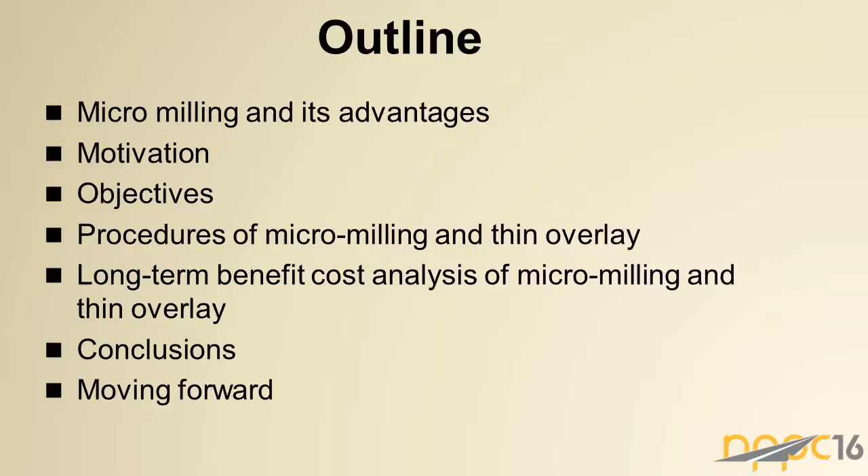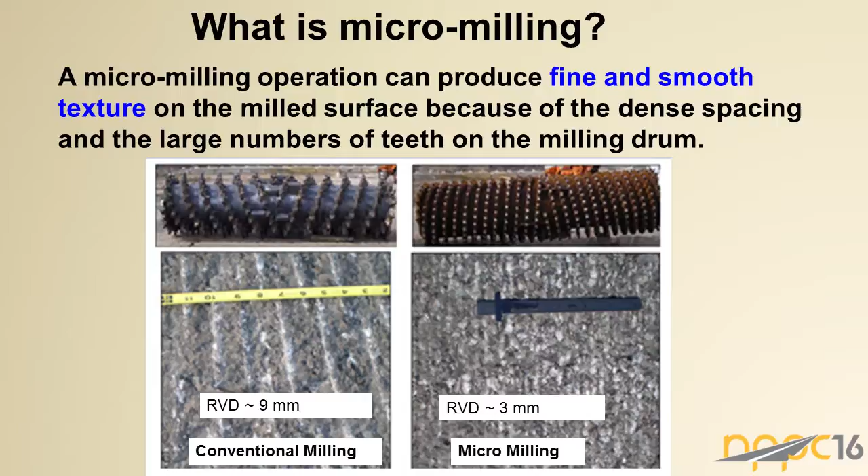Okay, so basically, what is micromilling? Micromilling is an operation that uses a much finer and smoother texture. Micromilling itself allows you to use smaller drums, which gives you a much smaller ridge-to-valley measurement. As you can see on the conventional side, you're using a much larger drum of 9 millimeters, and for micromilling, we're using a 3 millimeter drum, which gives us a much smaller ridge to valley.

Micromilling itself has several different advantages. You'll see improvement of the surface smoothness, comfort, and also safety. We had a project on I-95 around our coastal area, and once we rode the project and checked the IRI, it was actually lower than 825 millimeter, which we all know is comparable to real new pavement.

Another advantage to micromilling is improved work flexibility. It allows you to get traffic back on the surface a lot faster, and also gives the contractor flexibility in arranging his pavement operation.

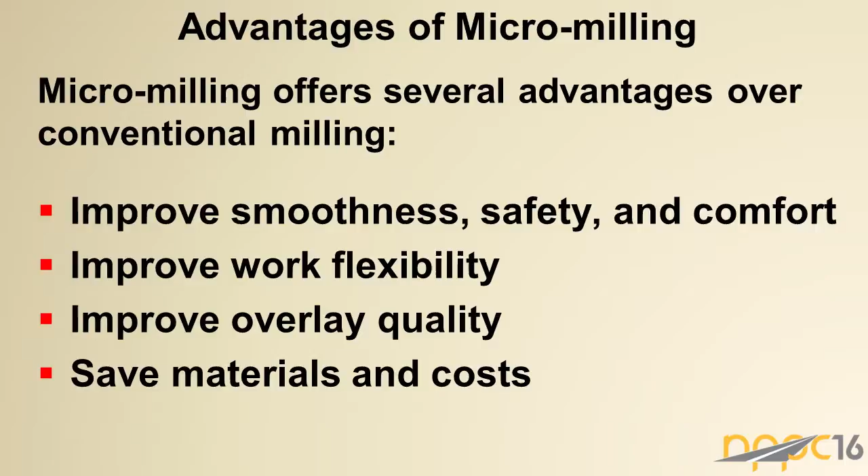Another advantage is improved overlay quality. It creates a more uniform surface and a better bond to our overlay than it would in a normal conventional milling surface. It saves material and cost, allowing you to use much thinner layers, and even a more porous surface.

Some of Georgia's motivations to go towards micromilling stem from constantly looking for better pavement preservation methods. In 2007, we decided to pursue this research and develop a new pavement process for micromilling, which was supposed to show us a more cost-effective replacement only on our thin open grade lift. Instead of milling down the traditional 1.5 inches, we decided to only take off the very top layer of our OGFC, because we identified that the bottom layers were sound.

Some other states, like Virginia and Maryland, are also using micromilling, but mostly for a good ride surface. In Georgia, we're using it, but we're also using a thin overlay. Basically, we'll take out 7/8 to an inch of our OGFC and replace it back without disturbing the sound base. We found this to be a great cost savings.

We identified that on our I-95 project, it saved us about $60,000 per lane mile. For example, we had 14 miles on that project, 6 lanes, which resulted in a cost savings of more than $5 million.

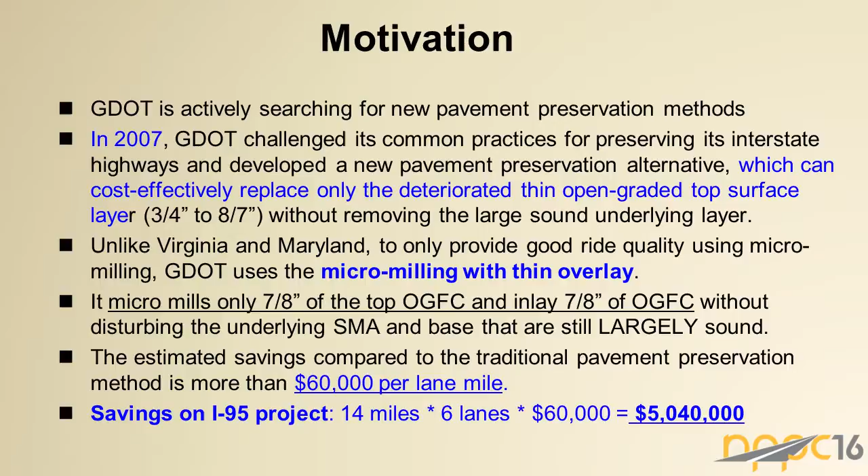I think we touched on this a bit, but to show you the actual detail: if you look at the conventional side, you'll notice you have your 7/8 layer of OGFC and then 1.5 inches of SMA. That's normally what we would mill out during conventional milling. But on the right-hand side, with micromilling and thin overlay, you'll see the red box showing a typical section of just the OGFC being removed.

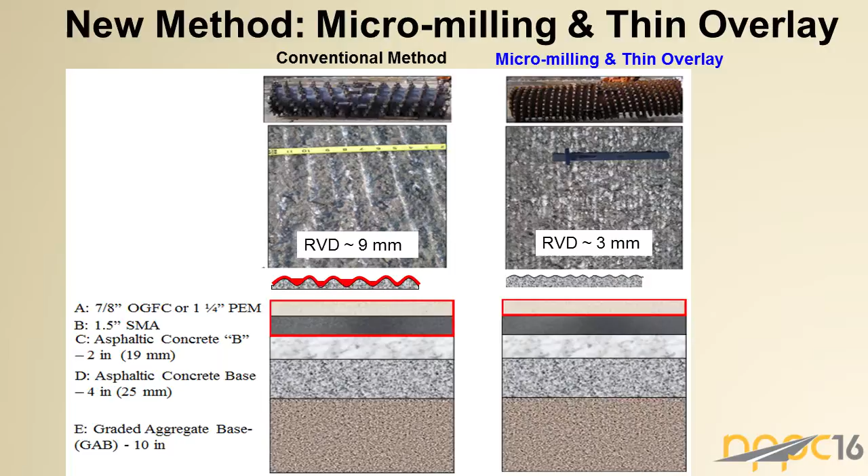To ensure the success of this program, we've implemented new processes to make sure we're meeting ride qualities. The construction procedures allow them to go in, do pre-treatment, micromilling, and clean. Before we start a job every night, we'll take a 1,000-foot section, adjust it, and make sure we're meeting the milling speed and drum speed.

We also verify that we have the ridge-to-valley depths we're trying to achieve by using an automated RVD, a ridge-to-valley measuring device. We've modified our laser profilers to retrofit them for faster, continuous measuring. We noticed we're able to get more real-time data and feedback when doing this.

If anyone is interested in knowing more about our specifications, you can find them in Georgia Special Provision Section 432, Mill Asphaltic Concrete Pavement on micromilling.

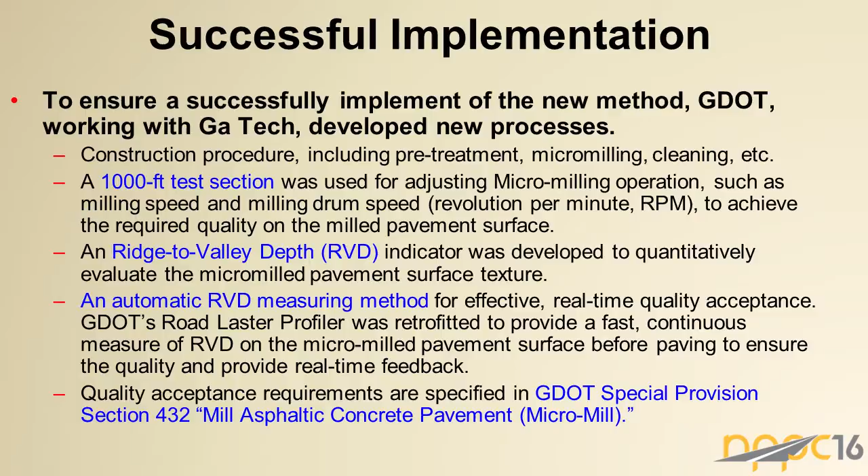Some of our typical projects: I-95 was done in 2011, 100 lane miles. I-75 was 2007, 96 lane miles, and I-285 in 2012 was another 100 lane miles. We're currently working on the downtown connector, the one Adrian spoke of, and we've had some issues with dusting and getting water on it.

But some of the things we're doing, like allowing cars to get on there earlier and letting them ride on the road for several days, we notice all of that dissipates and we get a much better bond. So we're kind of proud of what we're doing with micromilling in Georgia.

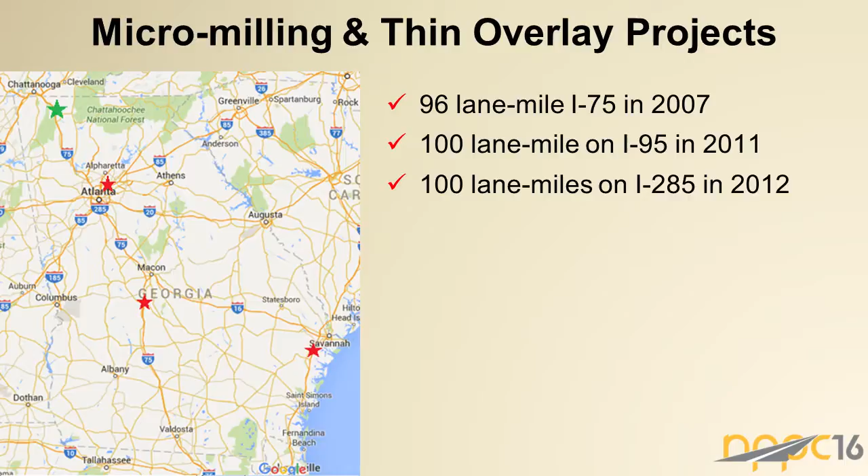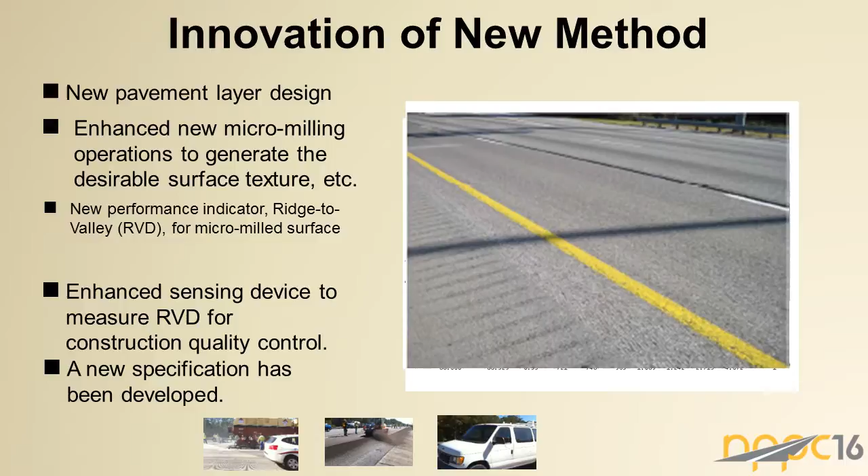They decided, well, if they can put in a smooth surface, the underneath—even serving 15 years or 12 years—is still good, you do not touch that. Just leave it there, the SMA continues on. So to summarize, there are a couple of new things there.

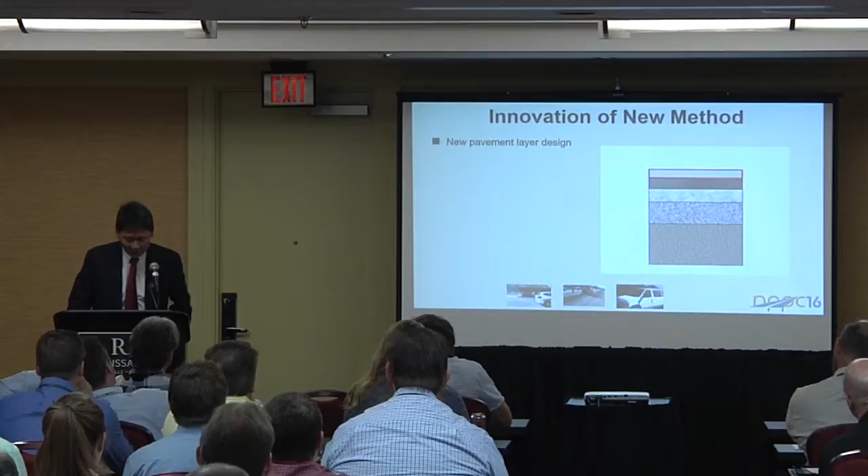One is a new design: the concept is that you're just milling out the OGFC 7/8 inch, and you do not touch anything underneath. The second is basically an enhanced new micromilling operation to generate this, using the drum and all of that.

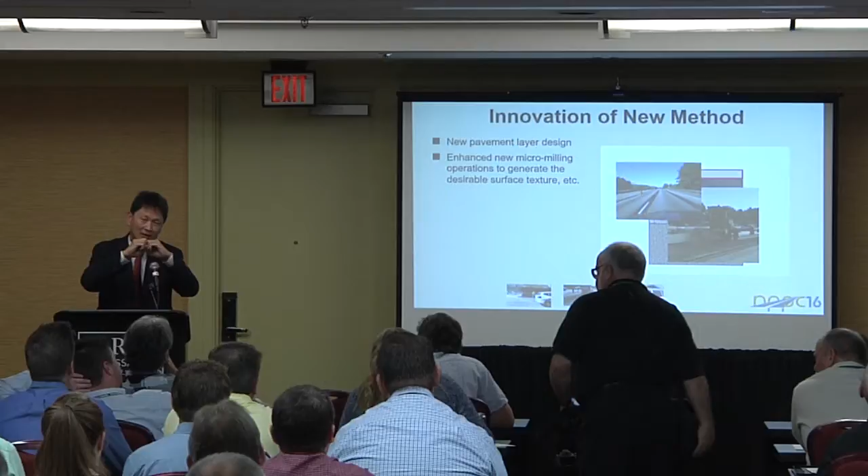From the contractor industry, they kind of bring this one in, so we set up a spec first. In a way, it's a ridge-to-valley, because on the OGFC, a lot of time, in our case, OGFC is on the top 7/8 inch on the interstate highway. You directly put that layer, so the surface water drainage becomes very crucial.

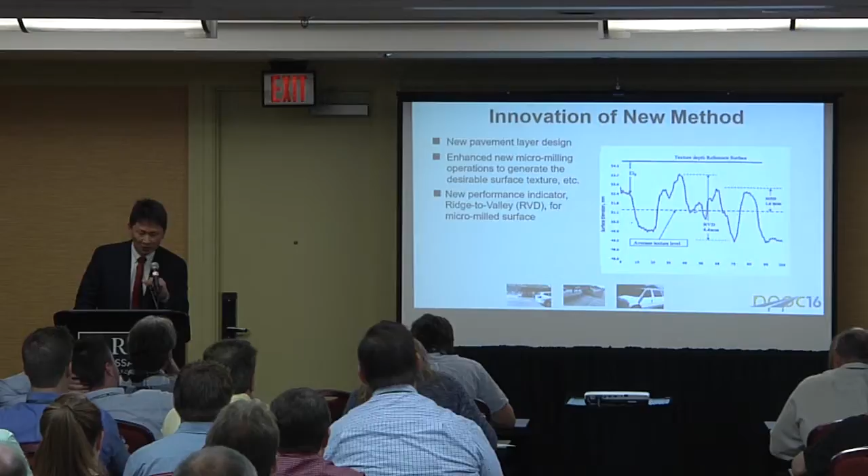Therefore, we set it up and put together a new indicator, ridge-to-valley. That texture indicator tries to ensure the water can go out smoothly, smooth enough, and water not sitting there to laminate the surface, because otherwise it's going to be gone very quickly. So there's a new texture indicator that's been put together.

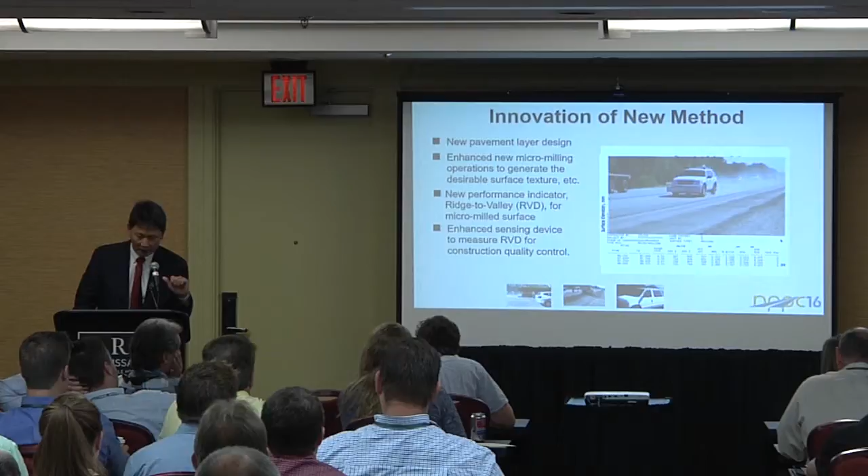Earlier, using the handheld test was really not practical. So later on, we kind of retrofit and put that together in the 3D laser, so you can test real time, every 0.5 mile. After milling 1 mile, you test 0.5 mile and get a result very quickly. In the end, there's a specific spec that came out of that.

I think one of the key things researchers would like to ask is related to this saving a lot of material. We did not even quantify the cost, like Andrew mentioned about the green saving - this is just material cost. You can save up to $5 million in just one project, roughly $60,000 per lane mile.

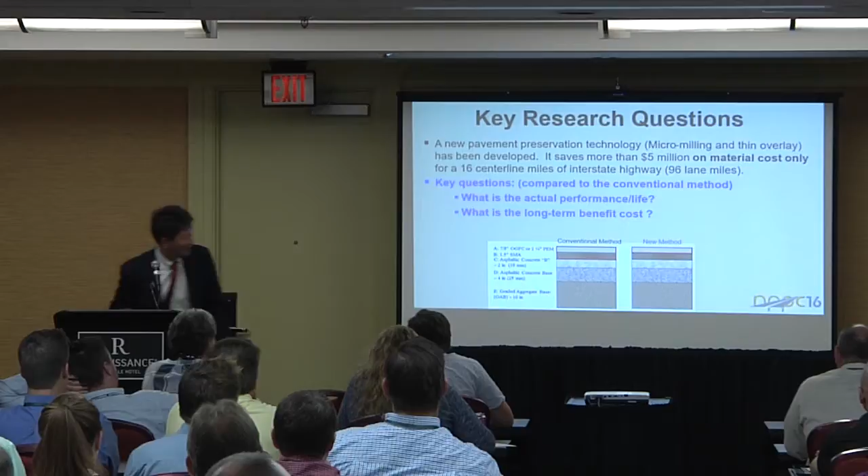But some people with key questions say, well, compared with conventional milling, conventional method, what is the actual performance? I think people say you save a lot of money here. If you look at the bottom, there's a difference, because conventionally you mill out and have SMA 1.5 inch. Now you decide, after serving 12 years, you're not going to mill this one, you just put on the top 7/8 inch.

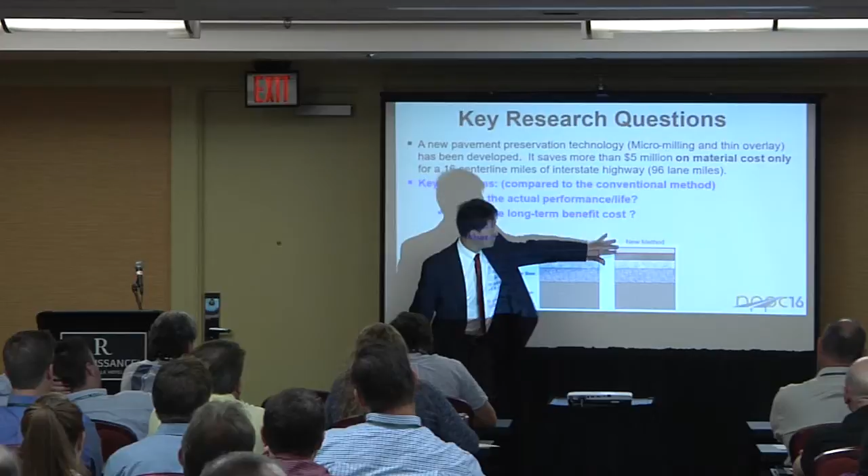People ask, well, what's the life? Originally, Georgia DOT was quite conservative, saying roughly 5 or 7 years life. But right now it's almost 8-9 years already, so we can actually see the performance, see how they perform. So this is the one I'm going to present to you.

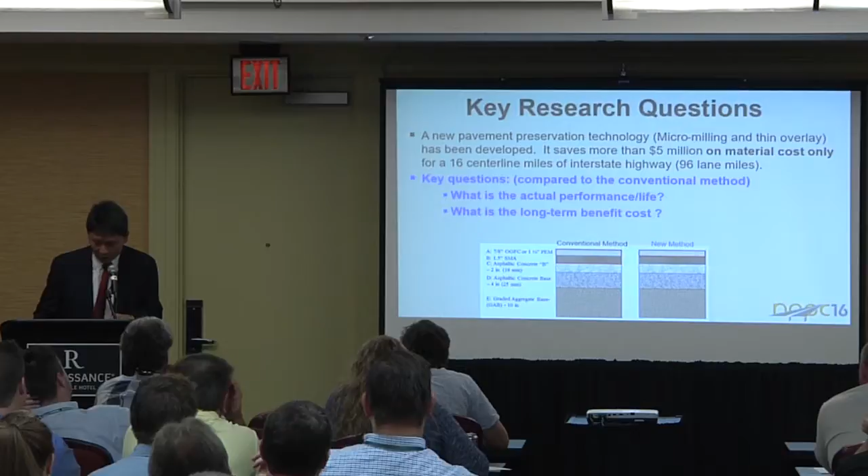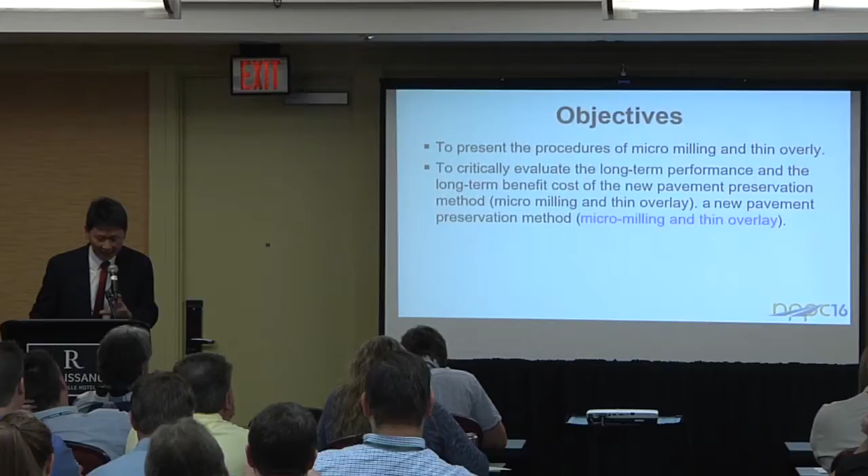So the objective here is to quickly show the procedure of micromilling and thin overlay. And then the second, critical one is to critically evaluate the long-term performance and long-term benefit comparing between micromilling and thin overlay and also the conventional method.

So this is the procedure. On the left-hand side, conventionally you mill out the whole thing, 7/8 inch and 1.5. Now you can mill the whole thing using SMA, but basically the whole operation we have right now is on the right-hand side - you do not touch the SMA. That's the saving, because you did not touch the one underneath.

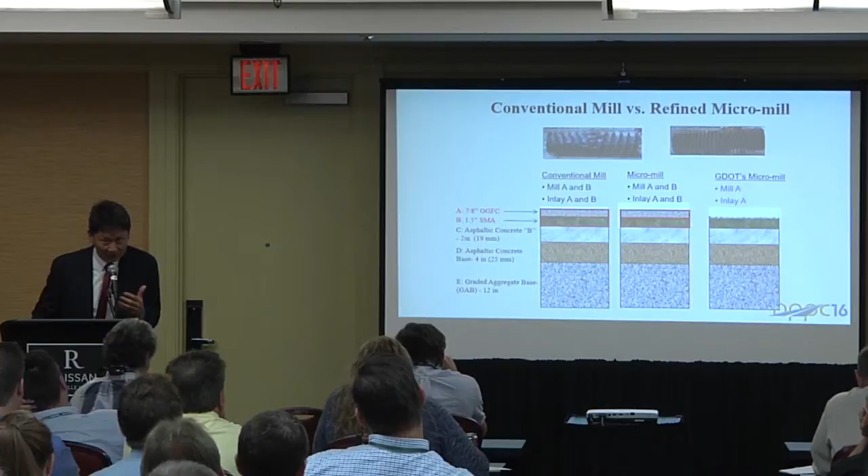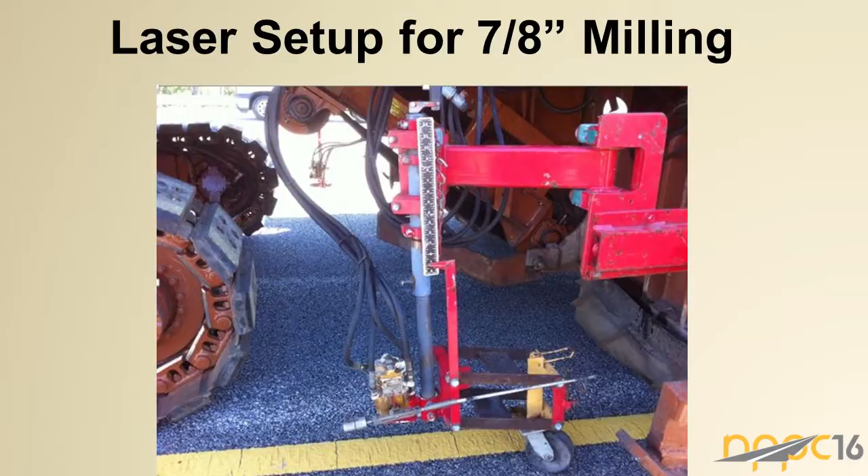But keep in mind, most of the underneath needs to be largely sound, so you can operate this way. So the first thing here is you need to set up 7/8 inch, because you only mill out the top OGFC layer on the interstate highway. So you set it up, and then mill out 7/8 inch OGFC.

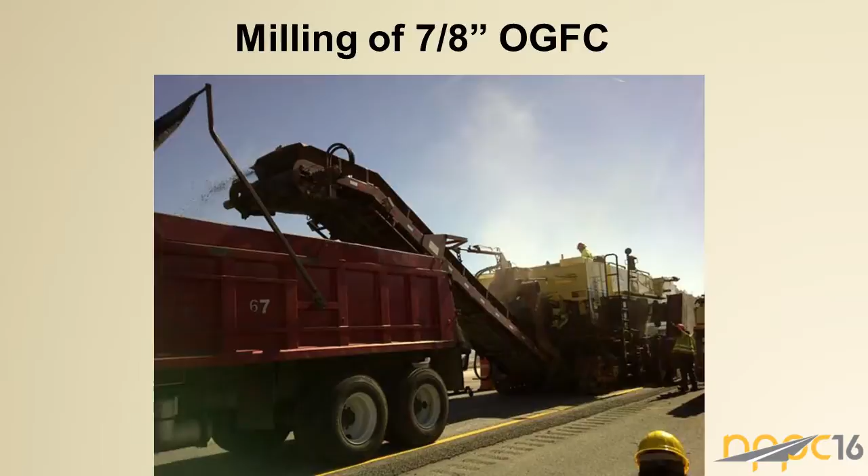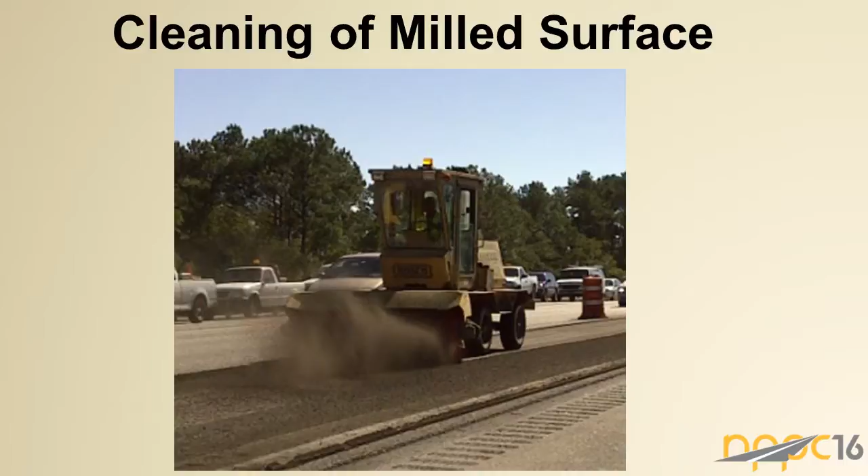After it's milled out, there's a cleaning procedure. Once this is finished, you open to traffic. In Georgia, we leave that allowed for about 3 days. Part of the reason is we feel the traffic can clean out the dust itself, making a better bond. Second, it provides flexibility for the contractor coming back, so after the whole project has been milled, they can do the inlay in one time.

So this is the one to keep in mind - quality control is quite important to make sure there are no voids. On the right-hand side, you can see underneath here, the surface is expected to be smooth.

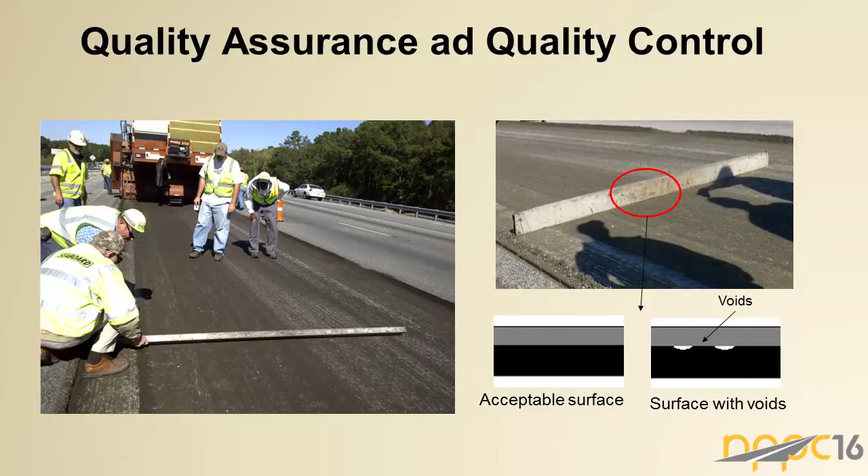The surface with voids there, those are the ones you do not expect to see, because all you see are uniform, open grade, and the water is more likely sitting in the interface layer. So you don't want water sitting there that delaminates the surface layer.

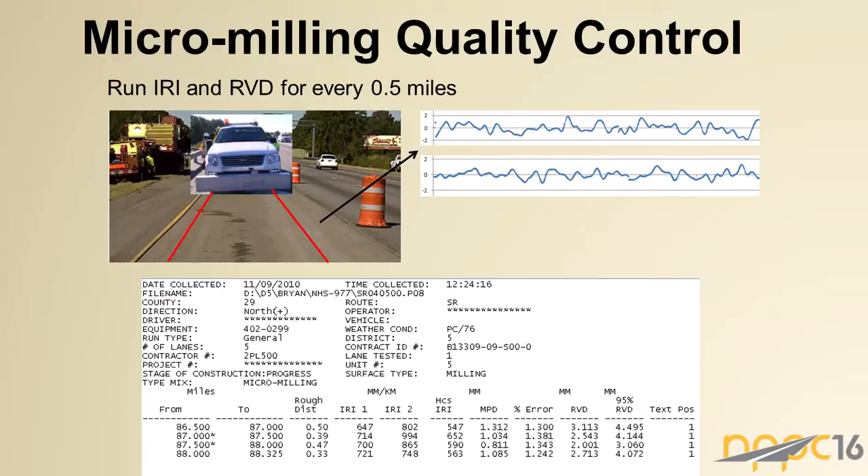So this is the definition of ridge to valley depth. We measure the sample length as 100 millimeters, similar to the AASHTO standard for the MPD measurement, one sample size of 100 millimeters. The simple way to see it is the ridge, the highest point and lowest point.

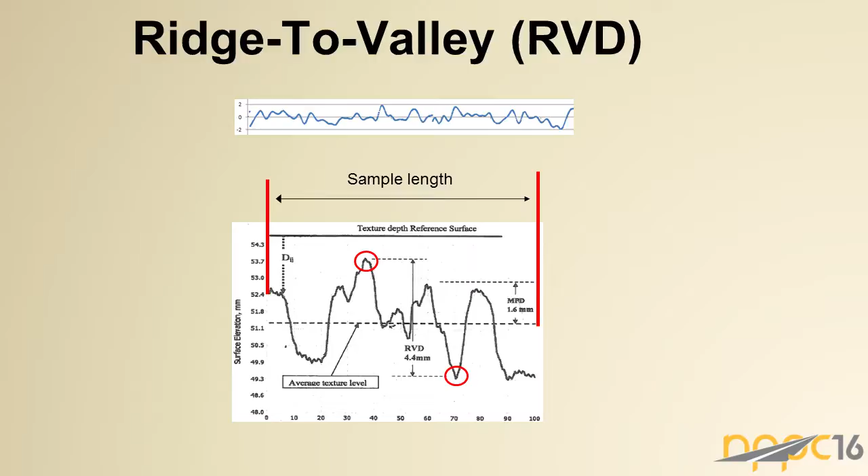The physical meaning is you want to make sure the water is not sitting there. So in that 100 millimeters, you don't want it to have a high upper point and a lower point. That's the way we set it up.

If you look at this one here, you can see this is the travel lane. On the left-hand side, that is a smooth surface. On the right-hand side, that's a little bit rougher surface.

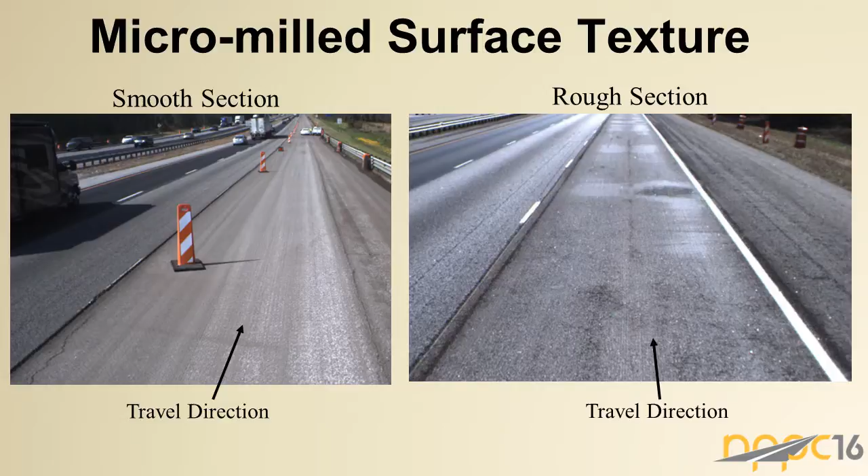At the very beginning on I-95, there's a couple of miles that were just one lane. I think that's been redone because the ridge to valley wasn't meeting the requirement, since once finished, you do the test right away.

In GDOT, at this point in time, the setting is 3.2 as the average value, that's the requirement as a spec.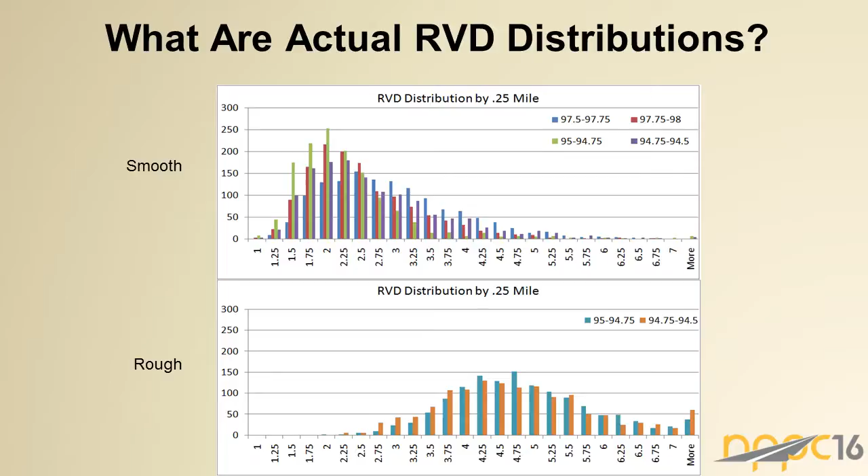So this is the one where we even captured some of the samples and brought them back, because we wanted to know what's the quantitative texture there to do some study.

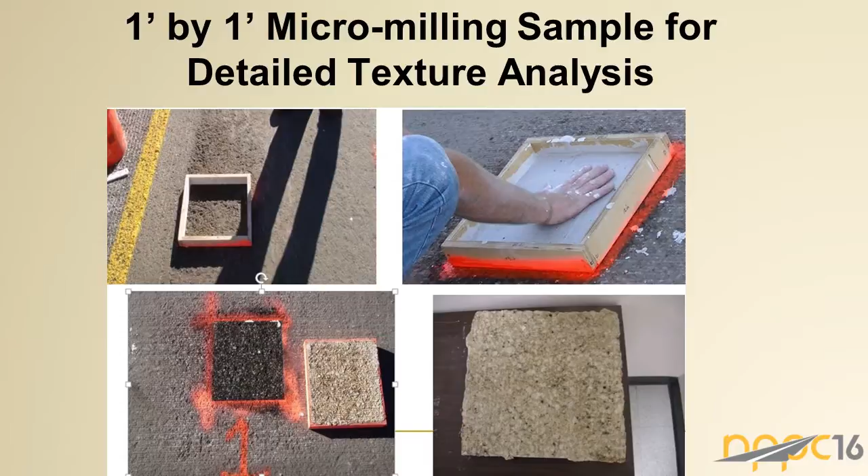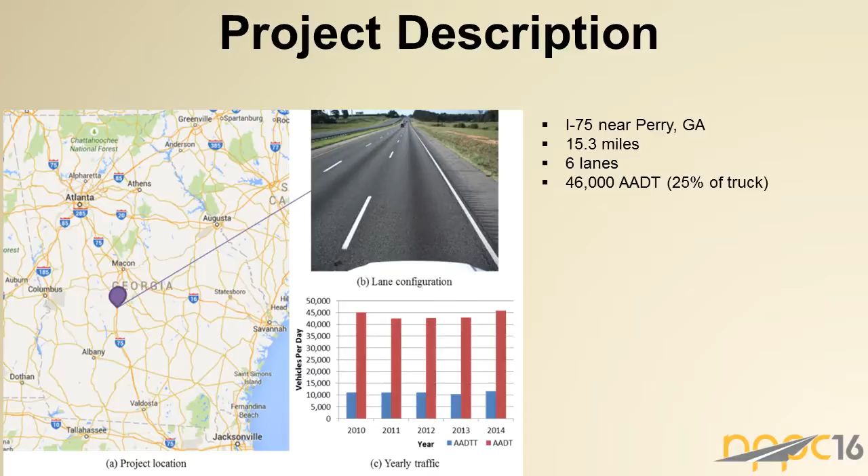This is the one I want to share with you regarding I-75, since it started in 2007. That has been set up. So we can see what's the performance now, because it saved a lot of money up front, but what's the life? This one is 15.3 miles, 6 lanes.

And this is the original design. Originally, this is a jointed plain concrete pavement underneath, built in 1964. As you can see on the left-hand side, those are the design. An AC overlay was conducted in 1994.

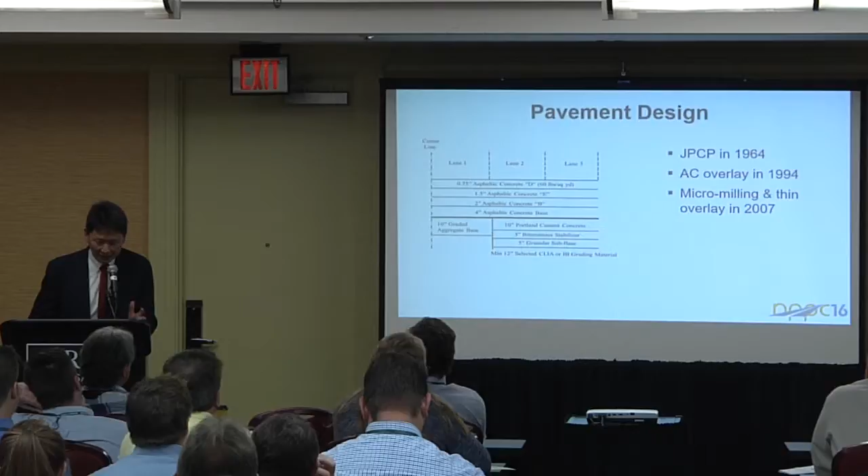And then micro milling and thin overlay was carried out in 2007. When this was carried out, you can see on the bottom image, that was a picture taken at that point in time, 2007. The condition there was not quite good.

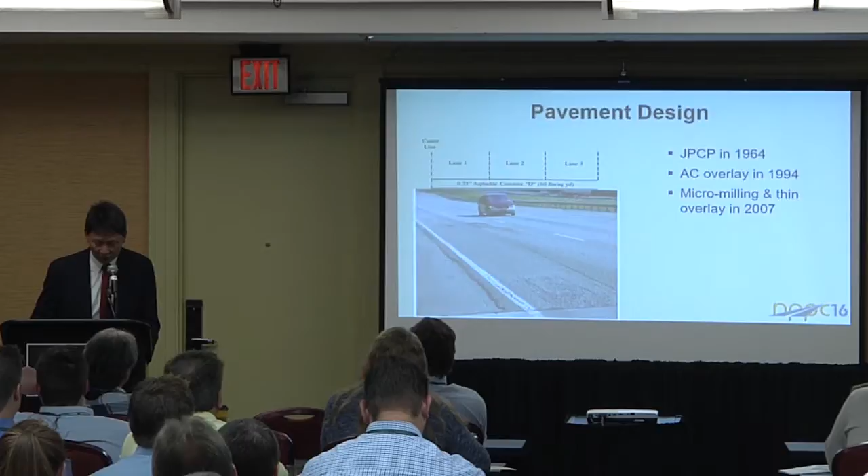Typically, how long do you expect in terms of life for the interstate highway? You'd expect that if you're putting in a typical pavement, it would require resurfacing roughly 10 to 12 years. That's a typical timing for you to do resurfacing.

Now let's take a look at the one with micro milling and thin overlay, where you just replace the OGFC basically with a super thin layer. In 2015, after 8 years since 2007, you can see the rating is still 85.

Typically in GDOT, they set up a timing threshold of 70. That's the time they do resurfacing. As I mentioned earlier, the conventional method is expected to last 10 to 12 years, and that was the typical timing to do resurfacing.

Originally in GDOT, setting up for the micro milling thin overlay, they were afraid because this is a lot of unknown. They don't know what the performance is going to be. So in the report, they kind of put in 5 years or 7 years performance. But right now, as you can see, it's already 8 years, and 8 years still 85. So you still have several years to reach 70. So it's almost a very similar life.

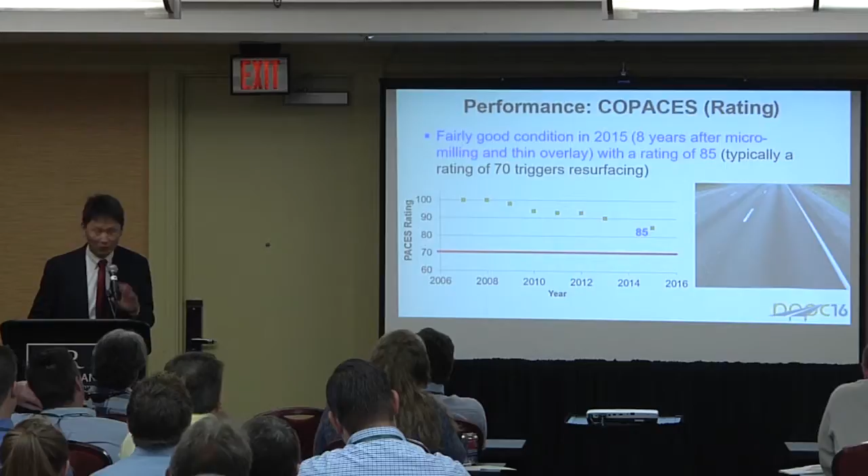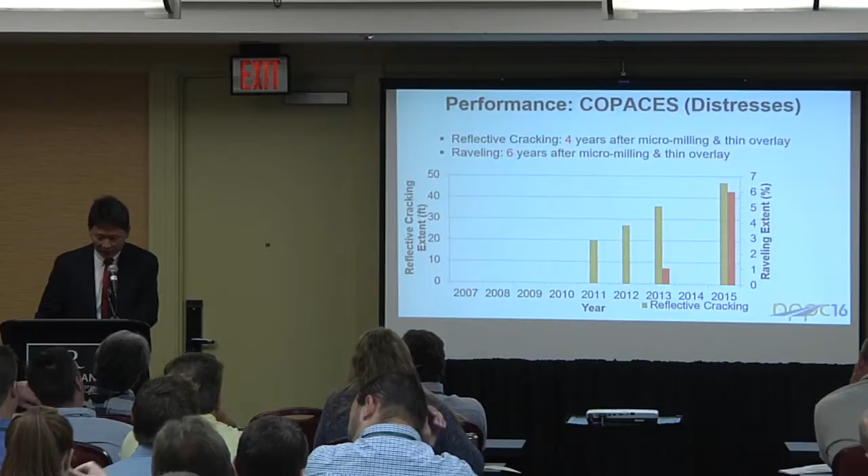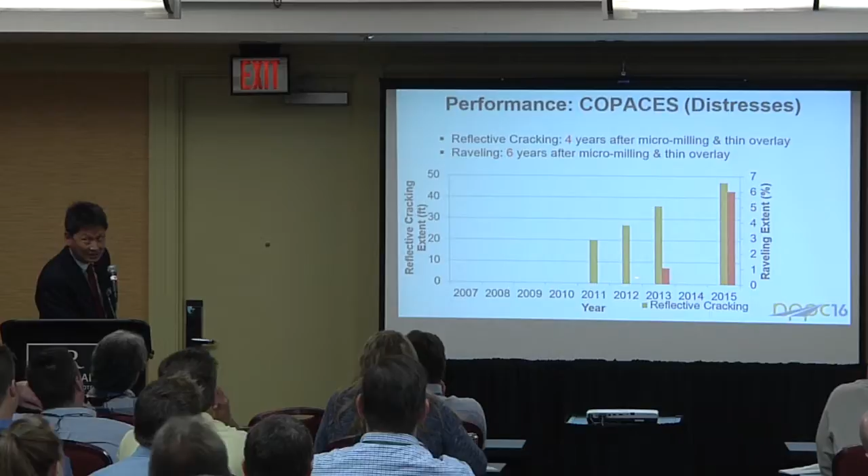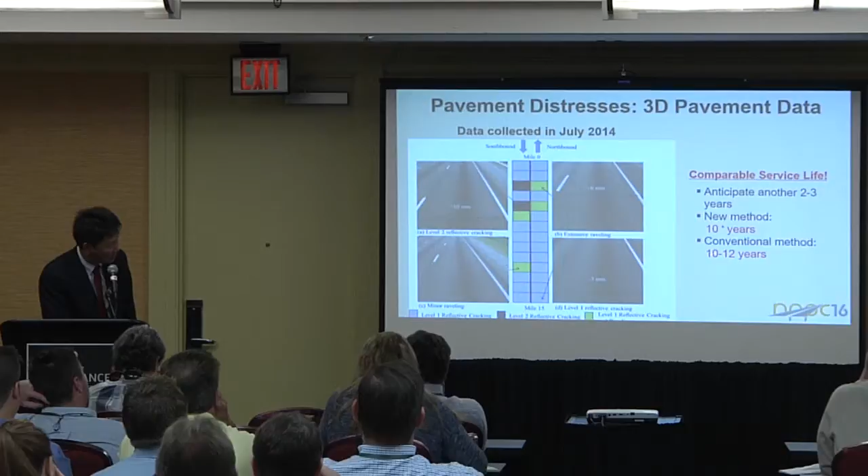So for the new method, it's not too much of a problem to be able to achieve 10 years. If you say the conventional method, there's 10 to 12 years. Therefore, we compared and did the life cycle cost analysis to get an idea in terms of 10 years and 12 years, what's the difference there.

So in terms of savings, in the short term, in Georgia, if there's 1,300 centerline miles, 6 lane, and you apply this method, basically the savings could be achieved like $480 million in a 10-year time frame, because if your life is 10 years. So there's a lot of potential benefits.

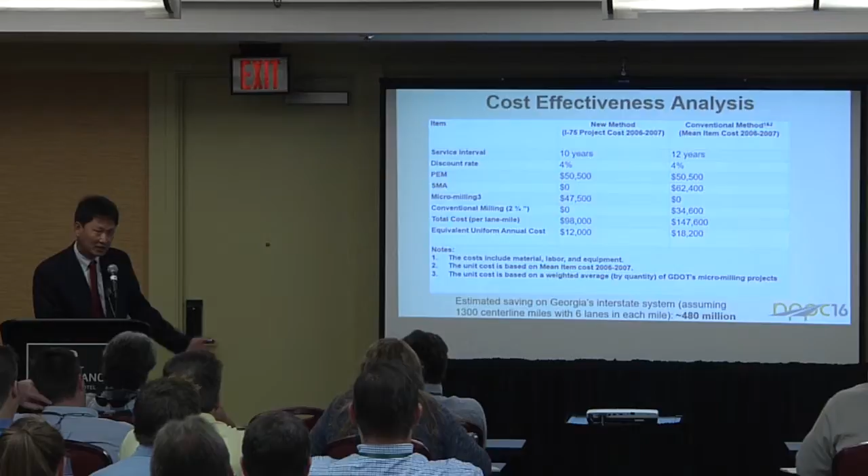So the one I presented to you is basically after 8 and 9 years, what's the actual performance. So far it seems like it's performing quite well. So GDOT continues putting the spec and continues applying it to different projects.

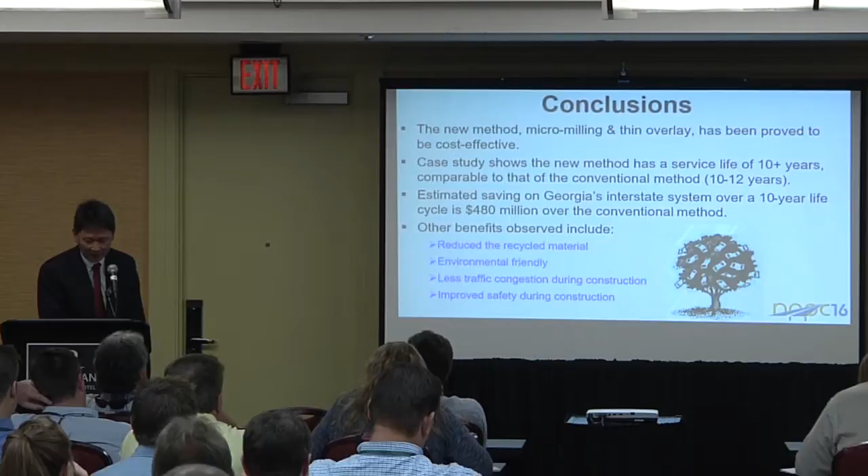So this is moving forward, the last 2 slides. This method has been proved to be cost effective. The case study shows that the new method has a service life of more than 10 years. So estimated costs in a 10-year time frame, if in a Georgia interstate highway, could save $480 million. This is just material cost, not counting the other benefits, sustainability.

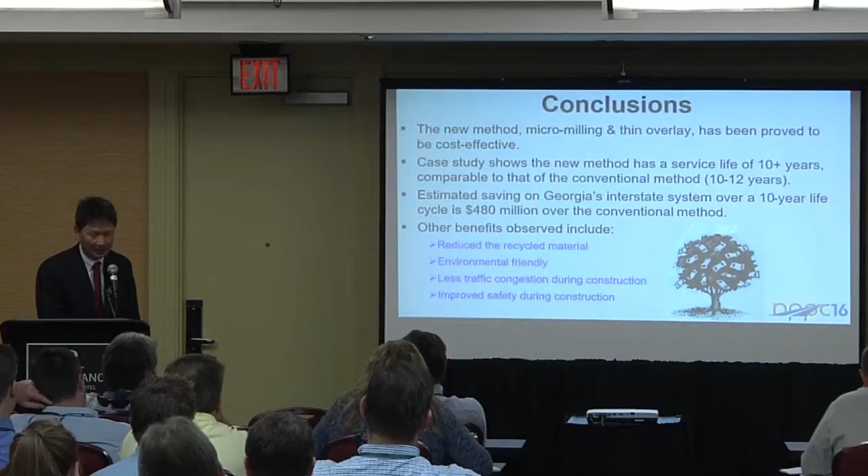Other benefits include reduced recycled material, being environmentally friendly, less traffic congestion, improved safety, etc., because you shorten the time in the whole process. Those are the ones that could be further quantified. And this is the last slide showing that it would make sense to incorporate this new method into GDOT's life cycle pavement preservation practice and management.

Currently, Georgia DOT also tests and validates on interstate highway with OGFC with a fog seal. So basically, at the very beginning, you may use a fog seal to extend a few years. And then before you replace the entire SMA, you may just use a micro-milling thin overlay. After another 10, 12 years, you're probably just using the micro-milling, and then you replace the SMA for 1.5 inch. So you can extend the life for a long time, at least 30-some years in a longer time frame. That's interesting to look at from the whole life cycle perspective.

The other study is probably on the criteria for micro-milling and thin overlay. Earlier when Georgia DOT was setting up, in selecting the project, it was very rigid. Basically, you need to do the structural test, everything is sound, and not too much distress, especially low cracking. But right now we're thinking, well, is it structurally sound? You don't have to replace the SMA. If there's cracking, and the cracking is at a low severity level, even up to a certain level of severity, would that still be valid for a micro-milling thin overlay?

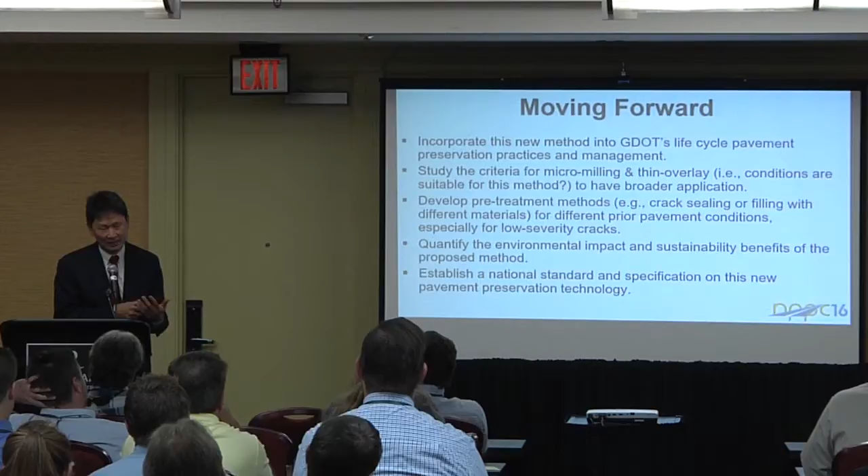In the past, for those projects I showed you, if there's a severity level 1 in Georgia DOT PACES condition survey protocol, basically they do not do anything. For severity level 1 cracking, what they did was just put in the tack coat. But in the future, would that be different?

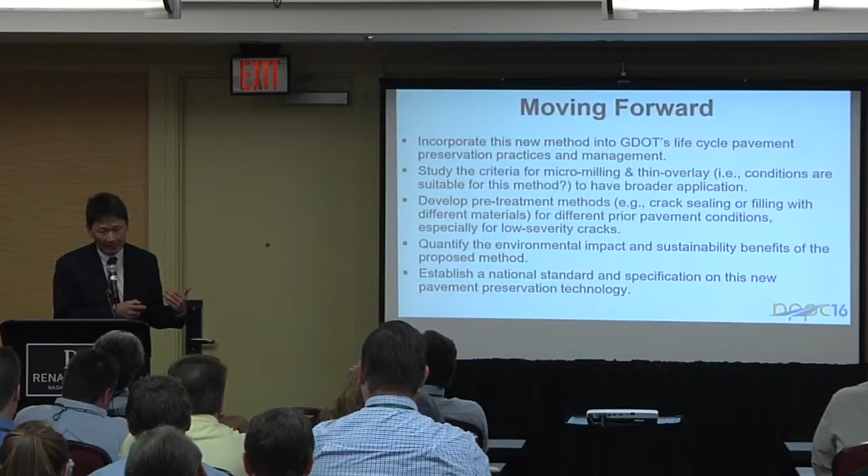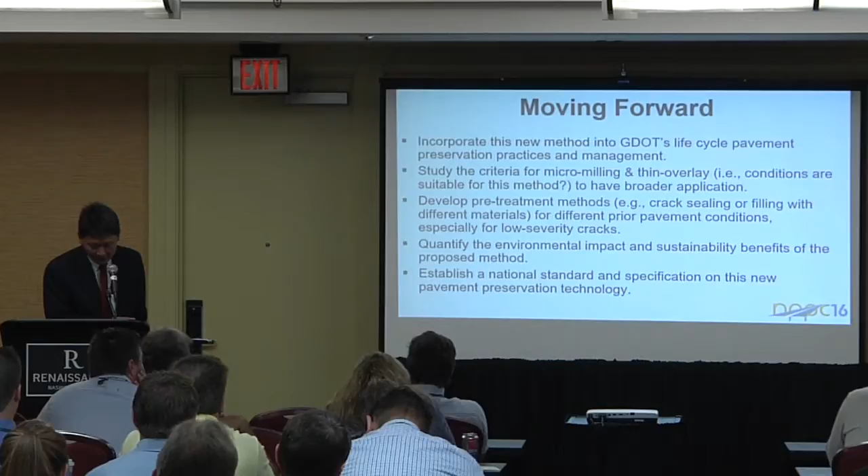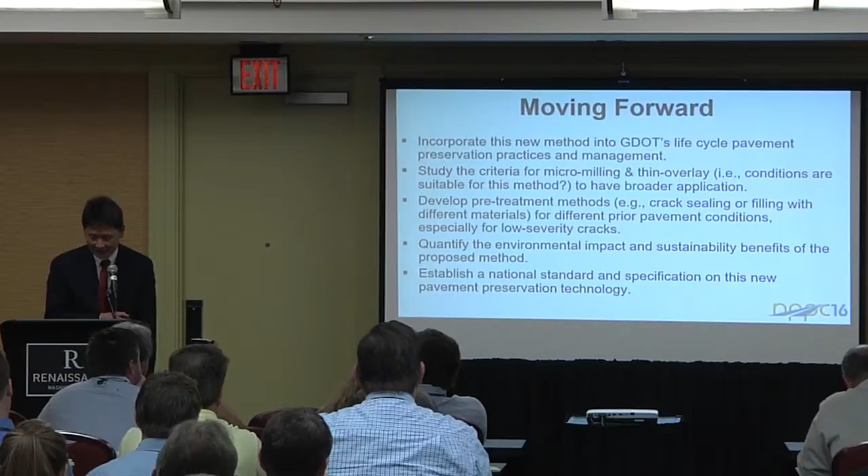That's related to the pretreatment method. We can further refine that, and as I already mentioned, quantify the environmental impact. Eventually this could be a good alternative preservation method that can be shared nationally, so there's a need to put this into a national standard and spec. Thank you very much.

I think that's a good question. Let me repeat it: the question was about rut depth—is that a piece of equipment, or something GDOT has, or is it a measurement? As a matter of fact, rut depth is a measurement, the same as MPD or other measurements.

So basically, in Georgia DOT's case, there's no need for any extra devices at all. Just put the computation into the software for the laser profiler that every state DOT already has, and compute the additional rut depth. Then you use that outcome for the spec. That's a very good question.

The thin overlay that you used—was it different or special compared to the thin overlay GDOT normally uses? I ask because I'm wondering if you got good results because you micro-milled first, or because you used a better thin overlay than normal.